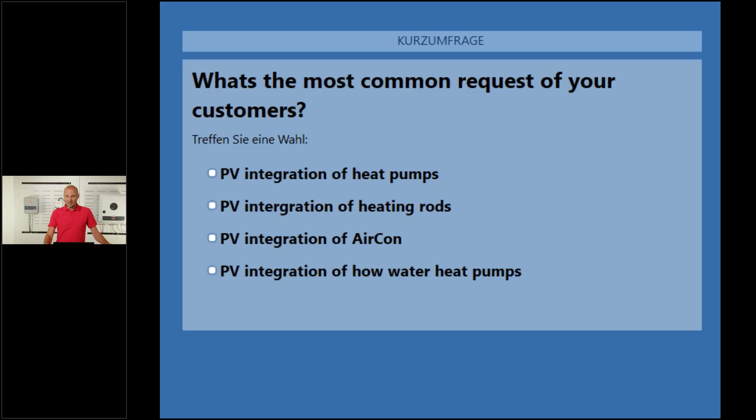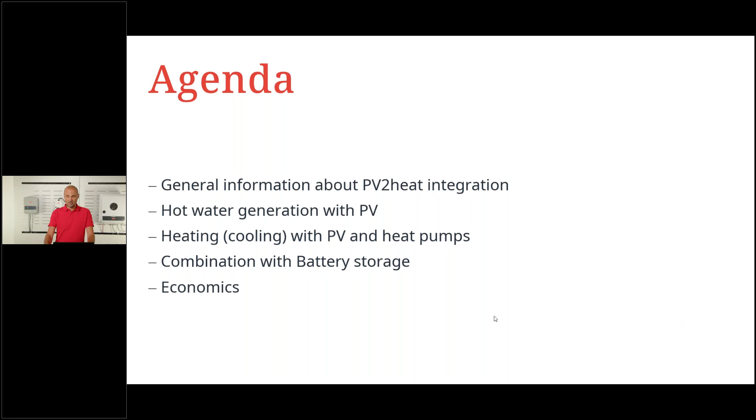Good, I think there is already good feedback. I guess I can close that, and it is about 40% are with the combination with the heating rod. So they see this as the most important need from their customers. 20% with heat pumps, and also air conditioning is about 20%. And some people are also interested in a hot water heat pump solution. Good, we'll look into these solutions later at a later stage. Thank you very much.

On the other hand, we see that we can also use this period where we do heating, and where we need heating and hot water in the building, which is possible with a certain maximum self-consumption, but of course limited. On the other hand, the summer period, where we need especially hot water and possibly cooling, is of course much more important for us, because this can be supported from the PV system quite easily.

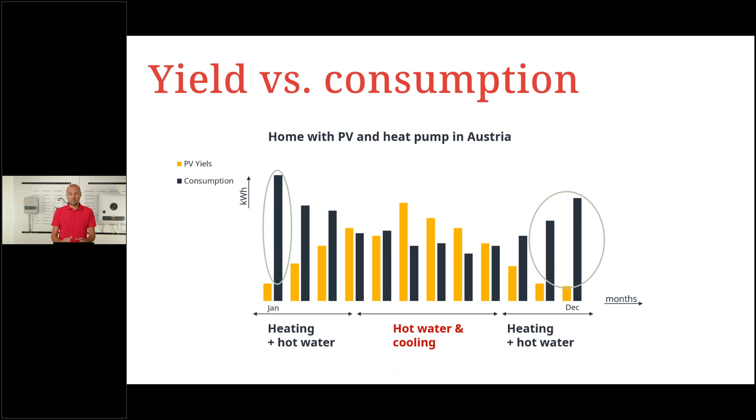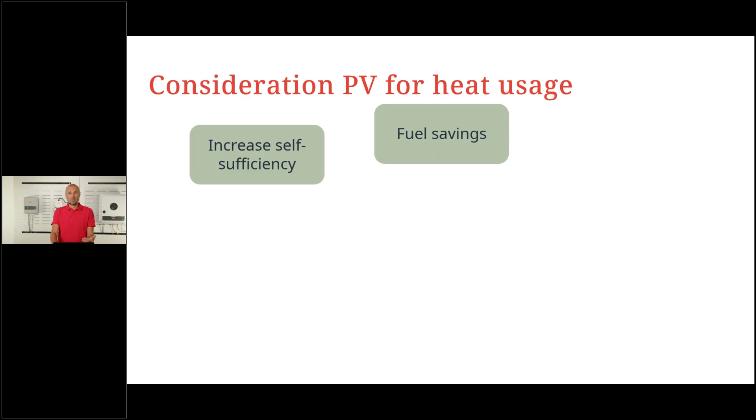Special considerations for PV to heat usage: we want to increase the self-sufficiency of our system. We want to reduce fuel cost for the main heating source. If it's gas heating, oil heating, pellet heating, or wood heating system, we want to reduce and save this as much as possible. We want as well to conserve the primary heating system, so we want to increase the lifetime of the main heating system. Then we want also, of course, to reduce our emissions. We want to have matched components, of course probably from one manufacturer, or at least in a way that supports other components. And it should be safe functionality.

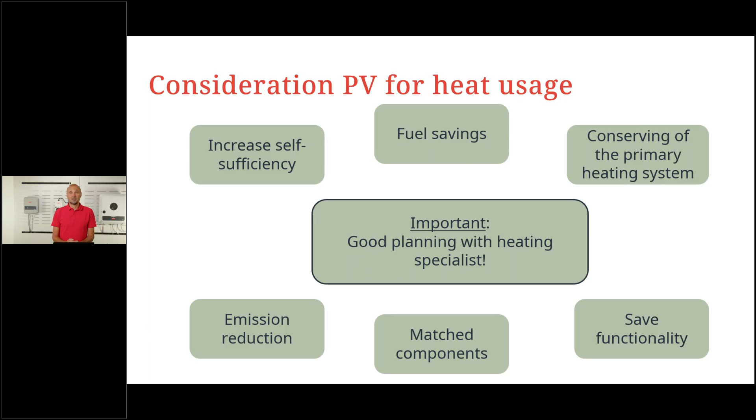So of course it should work properly. The customer should never have the problem of a cold room or cold water because there's no PV power available. And therefore, good planning with the heating specialist is really necessary in many cases. So this is our first recommendation here: please get in contact with the heating specialist who did the heating system, and try to find the best way to combine that with your PV system.

From Fronius, we offer basically two solutions with our Gen24 inverters. First, you can use the SG Ready output of the inverter, which is basically a load management digital I/O 12 volt, which you can use to give a contact to the heat pump. Second solution is a modulating heat pump control via our open interface Solar API or Modbus TCP, where you can read out the data from the inverter. Some heat pumps can do that - I'll show you later which ones are compatible.

The other solution for hot water generation is our Fronius Ohmpilot with the heating rod, where we use surplus energy from the PV system to be sent to the heating rod, and we store the hot water in a hot water buffer tank. Additionally, we also have an SG Ready contact here, so this can be used on the Ohmpilot too. We have a relay contact, so no additional component is required when you use this contact from the Ohmpilot.

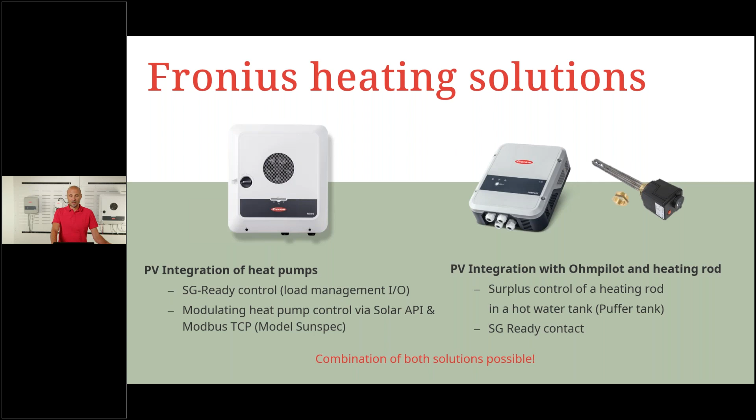Of course, combinations are also possible. You can have the modulating heating control from the Gen24 as well as using the Fronius Ohmpilot for the hot water generation in summertime. So that's also recommended, and I'll give you more details later on.

Now let's start with the hot water generation and the Fronius load management. We have 4 digital outputs on the inverter, which you can set for point load management. You can give out a digital I/O for the heat pump to produce hot water, or possibly as well to control the air conditioning. The air condition could be started from that relay contact and used only in the period where we have really high temperatures during daytime, avoiding running time at nighttime.

Of course, this is maybe sometimes not appreciated - some people would like to have the air condition running at nighttime too. In that case I would not switch off the air condition at nighttime, but use it with a higher power during daytime. So this can be done quite easily.

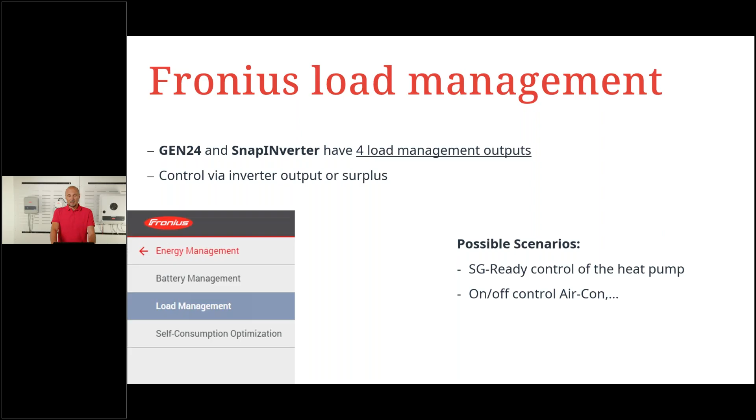What is SG Ready control? Very quickly: the hot water heat pumps usually have 2 inputs, the second one being the so-called heat pump start recommendation. When you give a signal on the second one, closing a contact from a relay, the heat pump will go to an increasing temperature. It will first increase the hot water temperature, but also possibly heat up the building for floor heating with 1-2 degrees higher temperature, to store the daytime energy in the floor or in the hot water tank, which you can use at nighttime.

So this is a signal and an input from these heat pumps, specially made for PV systems or for low energy tariffs. We use it here for our PV system output to give a recommendation signal to the heat pump, telling it: now there's enough energy available, you can start now and increase the temperature to use more of the day, so the running time isn't limited to nighttime.

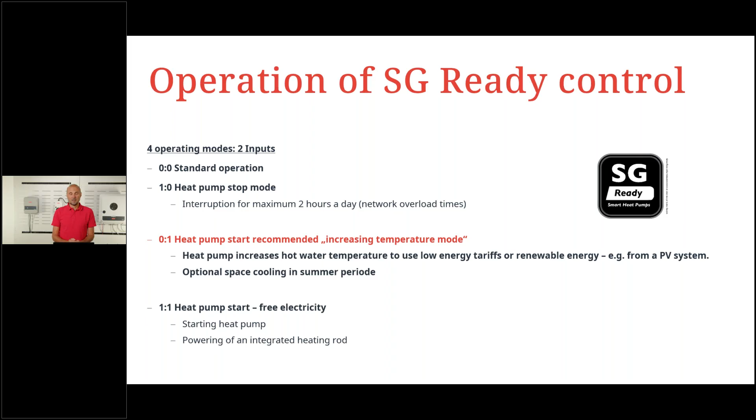There are also other signals available which we usually don't use - a stop mode or a start mode is also possible with the other relay contacts or inputs.

Now to the configuration - what you need to do first is the wiring from the inverter. We have a 12-volt output, so you need a 12-volt relay with a maximum coil power of 6 watts, and the closing contact then goes to the heat pump. So you need to wire the inverter with 2 wires to the heat pump.

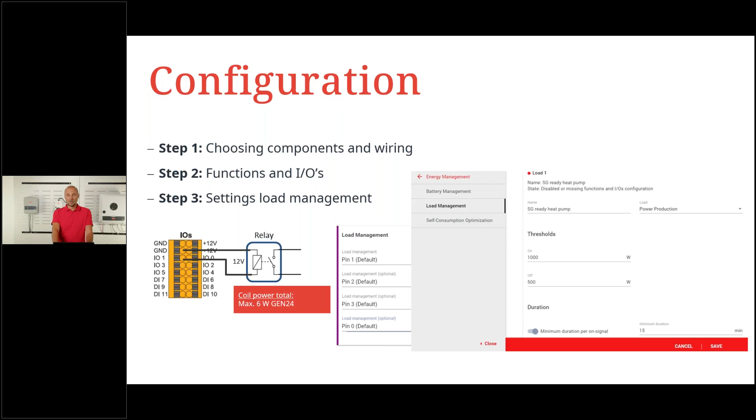Then you need to set in the web interface the load management - first the functions and IOs. You need to set, for example, pin 1 to be used for load management. Secondly, in the load management settings, you can set the threshold - when it should start and stop - as well as a minimum duration period, which we recommend as 15 to 30 minutes minimum running time, because that's better for the heat pump, to avoid start-stop cycles which aren't good for the compressor. That can be done quite easily in the inverter, and later on I'll tell you how to do it with the Ohmpilot too.

So when we come now to the Ohmpilot and the hot water generation with the Ohmpilot, the product, we have a maximum 3 kilowatt single phase output or 9 kilowatt 3-phase output on the Ohmpilot. So you can supply it with 3 phase, of course.

And with that, we increase significantly the self-consumption, up to 60% higher self-consumption with a smaller PV system is possible here. This is basically a solution which you can just connect to your heating rod in the hot water tank. Take care to have the right heating rod. We have other videos available where you can see which one you need to use exactly. So therefore, take care here.

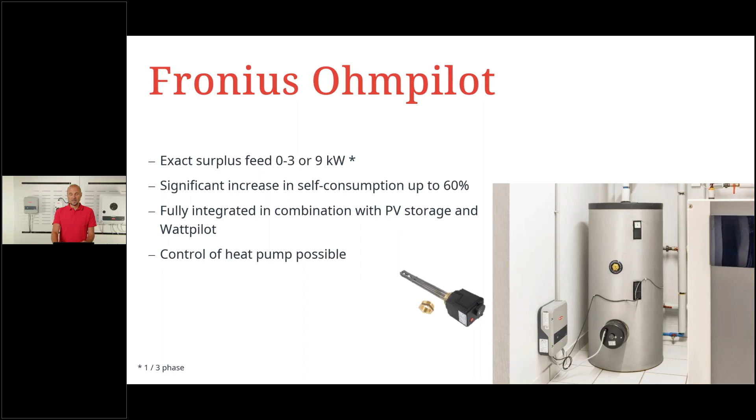The working principle is that we measure with this Fronius smart meter on the feeding point the surplus energy. This information goes via Modbus RTU or via Wi-Fi signal to the Ohmpilot. Then the Ohmpilot will produce exactly this or send this power to the heating rod, this 500 watt in this example, and there is no surplus energy then more available.

So it's a stepless control, and what we need in this case is a Gen 24, or it can be also a Snap Inverter with data manager 2, the Fronius smart meter at the feeding point, the Fronius Ohmpilot with a temperature sensor optional. We recommend using it because then you also see the temperature in SolarWeb, which is quite good, and the boiler or hot water tank with a heating rod is of course also necessary.

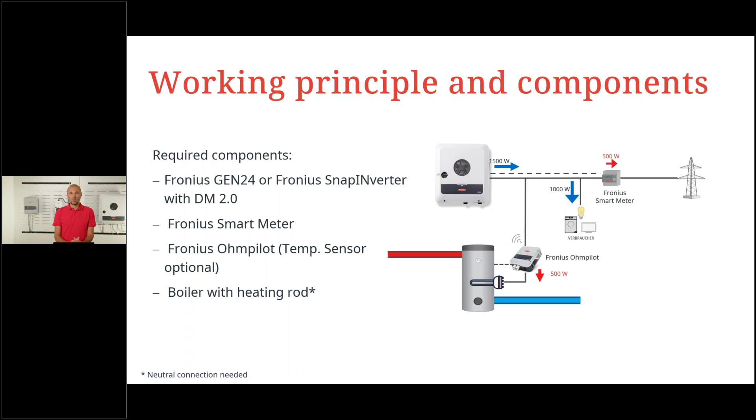Here we see also an example on a sunny day. On a sunny day, we increase temperature to a higher level. You see the red curve, the temperature curve, increasing here from, let's say, around 55 degrees to 60 degrees. We possibly have here as well a bigger hot water tank to store all this energy, this hot water, in the hot water tank. So the temperature is displayed as well, the energy in red color, which goes to the heating rod.

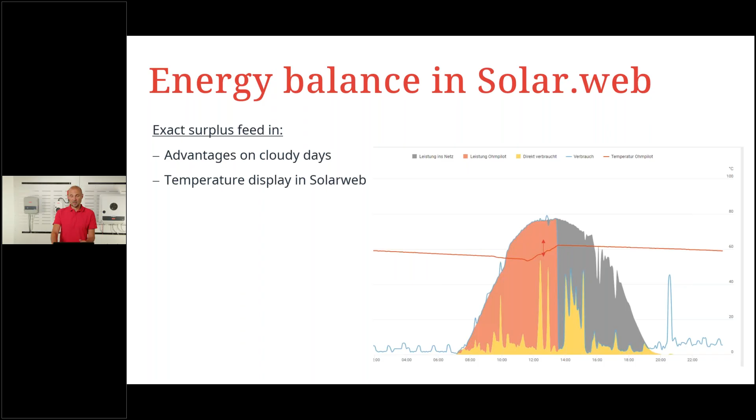The wiring is also quite simple to do. You see the input on the left-hand side, 1 phase or 3 phase. On the right-hand side, we go to the heating rod. This is a single phase heating rod in this case. If you have 3 phase, there's in the middle also a connection for L2 and L3.

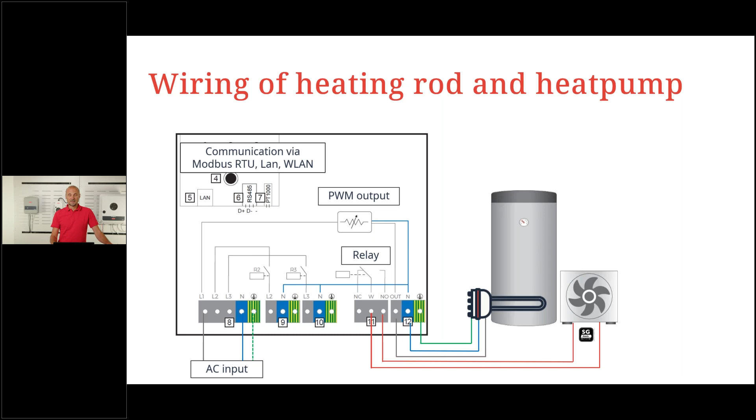With the relay contact here, we could also control our SG Ready heat pump in this case. The normally open contact from this terminal will be used with 2-wire to the SG Ready input of the heat pump, and this will then additionally produce hot water or do something else, or heat up the building, whatever. In this case, we would also run first of all the Ohmpilot when we have surplus energy available, and use maybe higher temperatures here, because the heat pump is usually only working efficiently up to 50 degrees. If it gets higher temperatures, it will reduce its efficiency, and then it's also okay to run it with a heating rod possibly. With a heating rod, we can go up to 60 or even higher temperatures. So therefore, it makes sense to combine that and use this combination.

How to do the settings on the Ohmpilot? We first set the single phase heating rod. In this example, it will be measured automatically, so the power will be displayed, in this case 3 kilowatt. Heater 2 is our relay contact, which we need in this case for the SG Ready heat pump. We then set a certain feed-in threshold, in this case 3000 watt, and a switch off threshold. This is the power of the heat pump, and the switch off threshold in this case, for example, a small consumption of 500 watt. With that, the contact would come when we have 3 kilowatt surplus energy, and then stop again when there is a consumption of more than 500 watt.

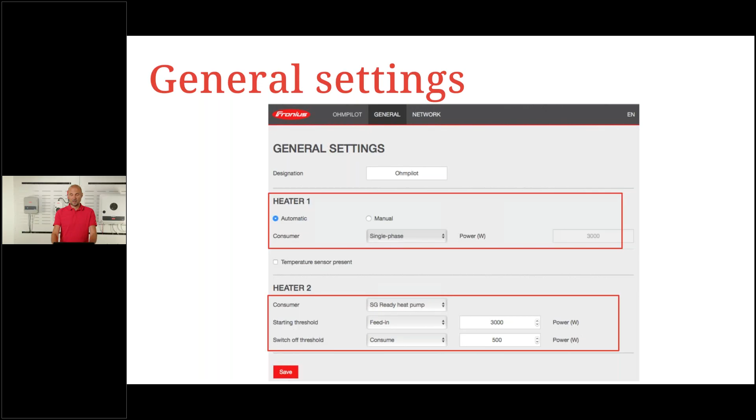What you can also set is a temperature sensor, and with it you could adjust certain day times where you would like to have a certain temperature. With this control, you can make sure that you have your temperature available when the customer is at home, for example arriving in the evening and wanting hot water. If the PV system doesn't produce enough temperature in summertime, then the hot water would be generated from grid power, or also with the heat pump.

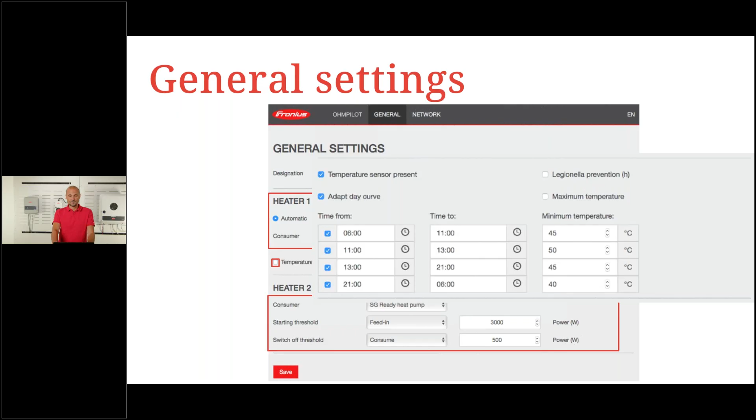Now the second part is the connection of the heat pump, and here we have also the cooling part integrated. Basically, what many times happens, which is kind of worst case, is that heat pumps are not PV optimized. They're running early morning, at nighttime, and as well in the evening, but at a time when we have no PV power available. So you see this on-off heat pump switching on and off all times during daytime, but not using a lot of the PV power.

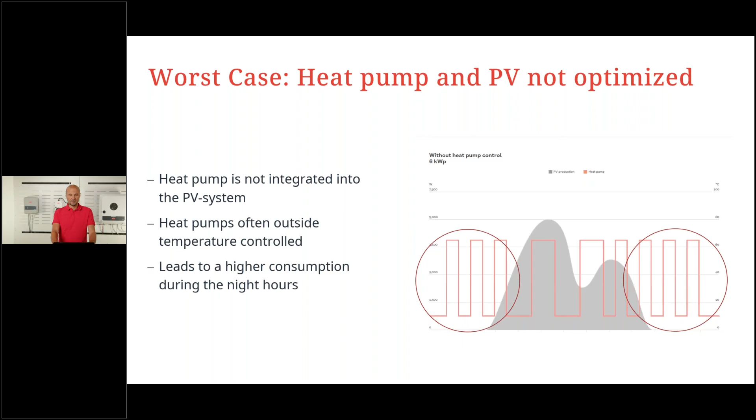This, of course, can be avoided if you set the timer of the heat pump, especially in the summer period, to a later hot water generation, not too late in the evening, maybe 2 times - once in the morning, around 9, 10 o'clock, and the other in the afternoon, 4 or 5 p.m. With that, you can avoid the running time at nighttime. So this is one possibility, the easiest way, let's say.

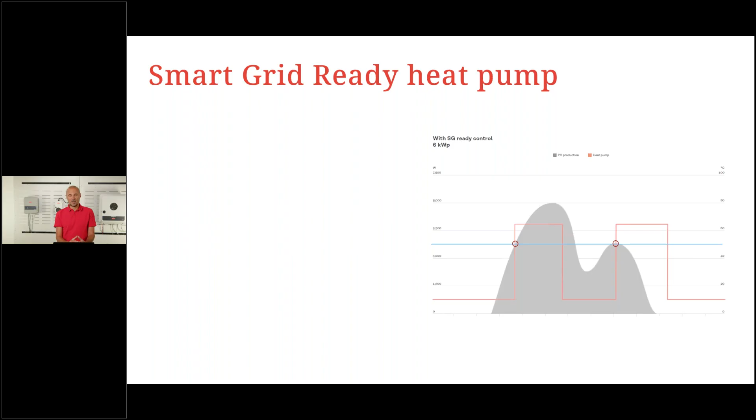But better, of course, is the SG Ready combination. When we control that from our PV system, we can really say start now, because now we have enough PV power available, and so we will only use the PV surplus energy. Of course not 100%, there are some limitations, because we cannot say exactly when we have enough PV power that it will also be there for the next 15-30 minutes, since the heat pump sometimes has a 30 minute minimum running time, which means we also consume some power from the grid. So it's not 100% from the PV system, but it is much better than in the picture before.

There's also a white paper available on that. If you look at the documents, you can find a link here, or this paper is integrated in this webinar. So feel free to download it from the documents.

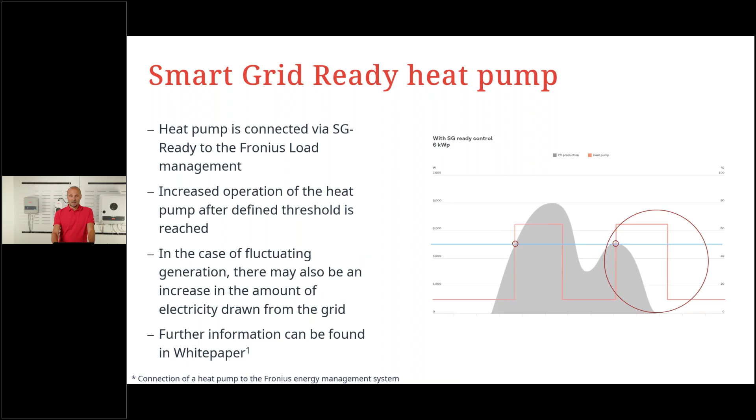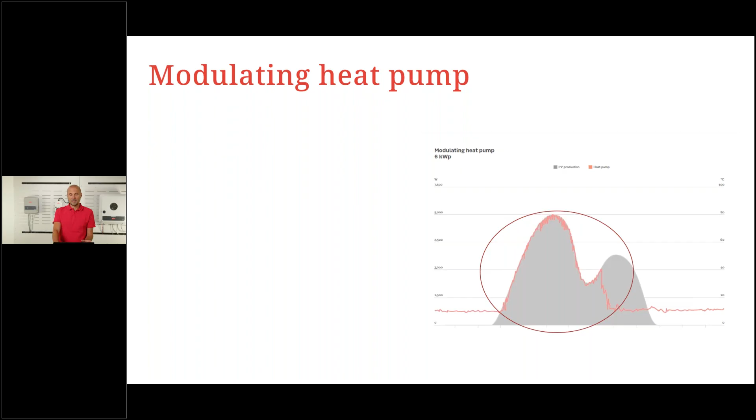The third possibility is the modulating heat pump or inverter heat pump, which really follows, when connected to the PV system, the production curve of the PV system. As you can see in the picture below, we run really according to PV power. There's also some night consumption, but it's very limited in this case.

Of course, for this we need a compatible heat pump, and at the moment we have the following manufacturers available - you can see that on our web page as well. It's IDM, M-TEC, Bosch, Ökofen, Nibe, and Wolf. There will be 2 additional new ones coming up very soon, which you can find on our web page. So feel free, just go to our web page - you will find under compatible third-party provider heat pumps this updated list with all the new heat pumps.

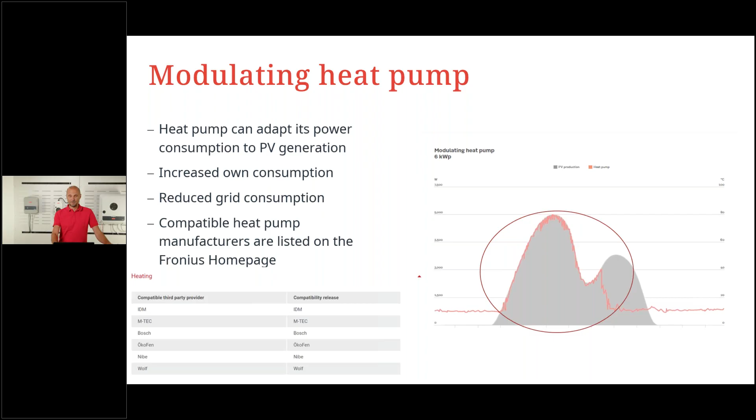Of course, this is the best solution you can implement, and therefore you just need to bring the inverter online, maybe set the Modbus TCP, switch on or activate Modbus TCP or Solar API. Also, of course, the heat pump has to be online and in the same network. Then you will get the communication from the inverter to the heat pump, and we can control the power and send it to the heat pump whenever needed.

Now, what to do with a battery storage combination? With a battery storage combination and heating solution, for example, as we show here, we have a Gen24 inverter with a BYD battery, we have the hot water tank, and we have also the heat pump. The heat pump is in this case controlled by SG Ready control from the Ohmpilot. We have the Modbus RTU communication between inverter and smart meter as well. The Ohmpilot is here, wired, connected via this Modbus communication.

And now, how is this working? Basically, you need to know that with the battery, you can avoid this grid consumption, what we have seen before when we have a SG Ready contact. The heat pump is running half an hour. Of course, when there's no PV power because of a cloud, the power would come from the battery. So you have a higher self-consumption, higher self-sufficiency when you use a battery.

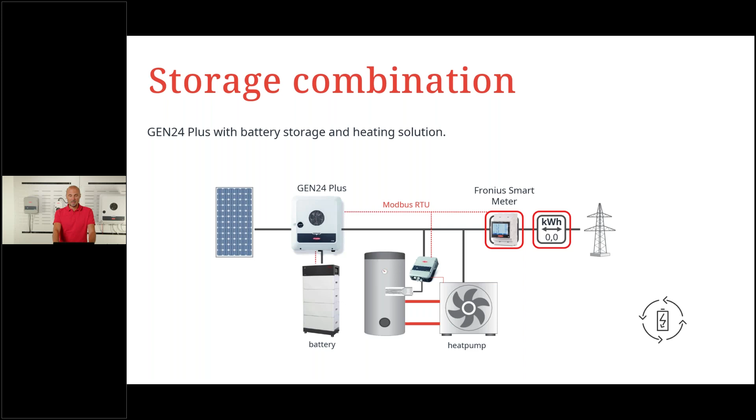This is always actually quite good and a good recommendation, because you avoid here with the SG Ready input the grid consumption, especially in summer period, in winter period. As you know, it is in any way quite hard to do that. This could look like this example here.

We have, first of all, this is summertime. Now, let's say we charge in the morning the battery. This is the green color. So all surplus energy goes to the battery. When the battery is fully charged, we send automatically the energy to the Ohmpilot. The Ohmpilot is second priority standard, and then we will produce our hot water, which we need in summertime, for example. Then the third priority would in this case be the load management.

In this case, for example, we switch on the air condition to a lower temperature, so more power to reduce the room space temperature. And this is our load management output. Could be as well as SG Ready output to heat up the building in the springtime or in autumn, or maybe to cool down the building with the heat pump in the summer period when it's a hot day.

So therefore, you just need to have the right heat pumps. Many heat pumps nowadays can do both heat and cool down the building. So they have both modes integrated, and you can just tell the heat pump in summer period when the outside temperature is higher than, let's say, 30 degrees, the heat pump should run in the cooling mode as well. So that's also possible with the heat pumps. They can do that. Just need the SG Ready signal, and then they cool down the building as well.

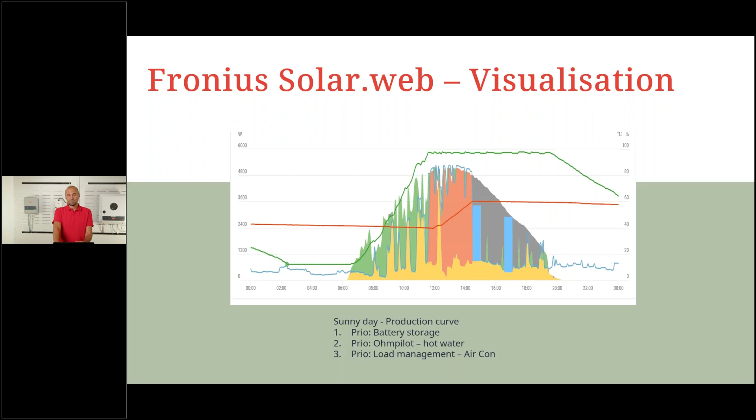Of course, you need the right heating system in your building. That's not always possible, but you can theoretically use that as well. So we have 3 priorities, and these 3 priorities can be set in the inverter. So you can say, for example, now load management is more important for me, and you will find under load management priorities the possibility to change here the priority.

Or you can also say Ohmpilot is most important for me, and I would like that to have that on number 1. Basically, I would say batteries should be always first, because when you have a full battery, you can run the building in a better way. So you have a higher autarky or self-sufficiency when you have a fully charged battery in the morning, and you can use that in the afternoon for your heat pump. You can use it at nighttime for whatever you need.

So just to tell you that this is possible to be set, and also to tell you, important with the battery, you are more independent, and also SG Ready contact or SG Ready control gives you more advantage, because you avoid grid consumption, because it's then coming from the battery. So this is here the important point.

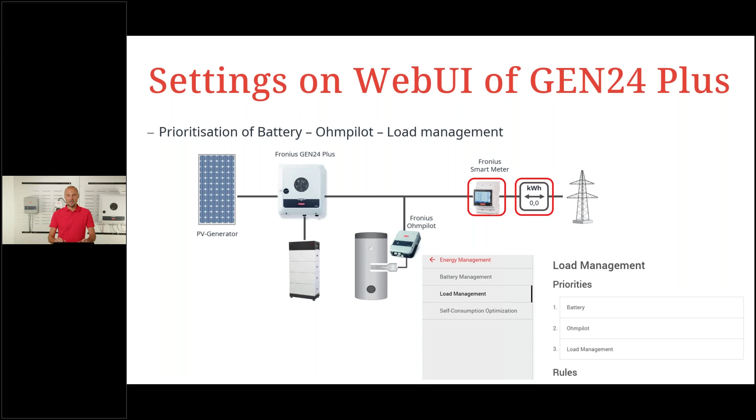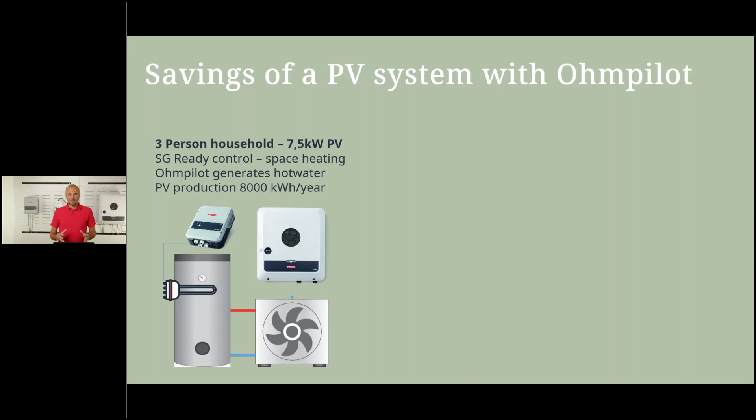Good. Last but not least, let's look into the economics. We have 2 reference systems which I would like to show you. One without battery, but with the Ohmpilot, a 7.5 kilowatt system in a smaller house, hot water generation with the Ohmpilot, SG Ready control space heating with the heat pump. In this case, we have a small consumption of the building, so a quite new building, smaller building, 160 square meter, and we have here in this case 5,200 kilowatt hour consumption. With our energy tariff of 30 cents per kilowatt hour average, we get a 1,560 euro electricity bill per year.

We have also a small feed-in tariff of 5 euro cents. This gives as a result 671 euro savings and 208 euro yield. So for the feed-in, what you feed into the grid, you will also get 208 euros per year. That gives in total 879 euro in this case for this 1 year. So quite nice saving, which is mainly in this case from the heating system, from the heat pump, and from the hot water generation.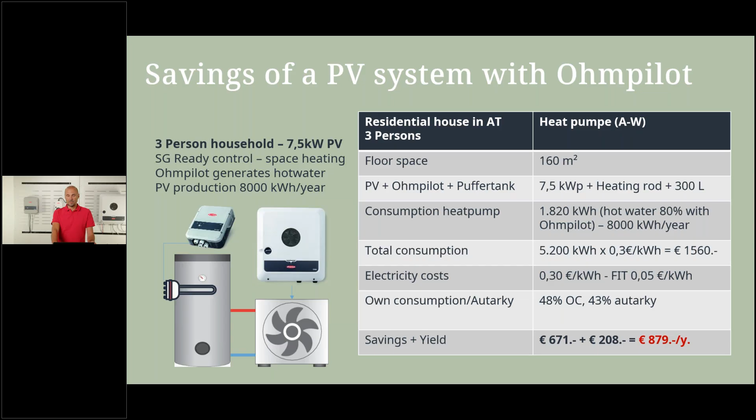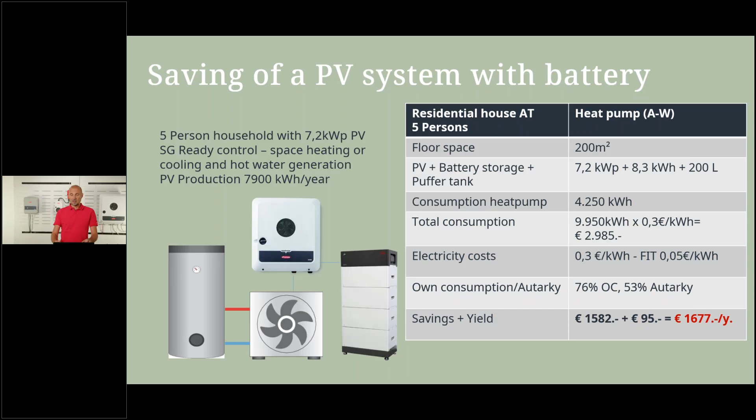As higher the consumption, as higher the savings, that's clear. But it's also depending, of course, on the control of the heat pump. So the heat pump autarky can be 50%, or it can be also only 20%. If you have a good SG Ready control or modulating heat pump, you can increase that up to 50% autarky. This is a number for average Europe, Middle Europe. Maybe North Europe will be a bit lower, and South Europe will be a bit higher because the heating demand is lower in that region. But you see, it makes sense, it's a good number, and of course good to do that.

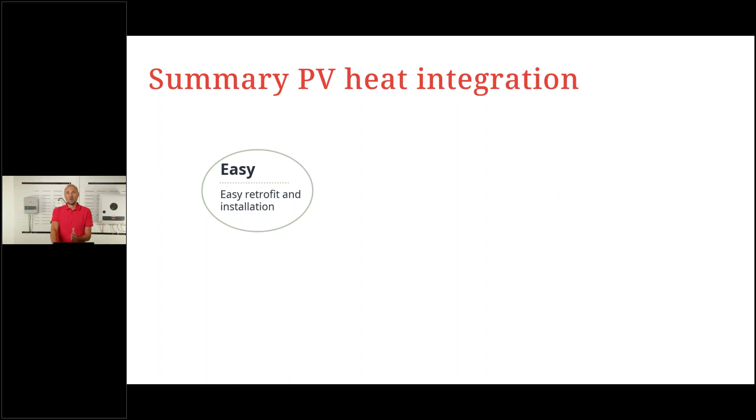As a summary, a PV heat integration is usually quite easy to do once you know how to do it. The installation effort is small, so you need maybe one cable from the inverter or from the Ohmpilot to the heat pump, and then of course the settings. The economics, the additional investment for the wiring is small, so you have good economics. We use our hot water from PV 6 months minimum per year, can be even more. We also have a longer service lifespan of the primary heating system because we can switch off the primary heating system in the summer period, and of course we reduce also the fuel of this heating system.

Yes, I already told you, low investment costs for the materials. What you need is usually a smart meter, heating rod, maybe a relay contact for the SG Ready input, and some wires. So that's a small investment, but the amortization can be achieved in a few years only. Optional, what's good is a buffer tank storage, which is of course useful where we can produce a lot of hot water during daytime and store this hot water for that day and the next day. So that's also appreciated.

Modulating heat pumps are always recommended. Usually the new ones are mainly modulating heat pumps, which you can better control from your PV system. So they also have lower energy power demand at the moment. And a battery storage is also a good combination because then it's also with the SG Ready control quite comfortable, and you use a lot of your energy from your PV system.